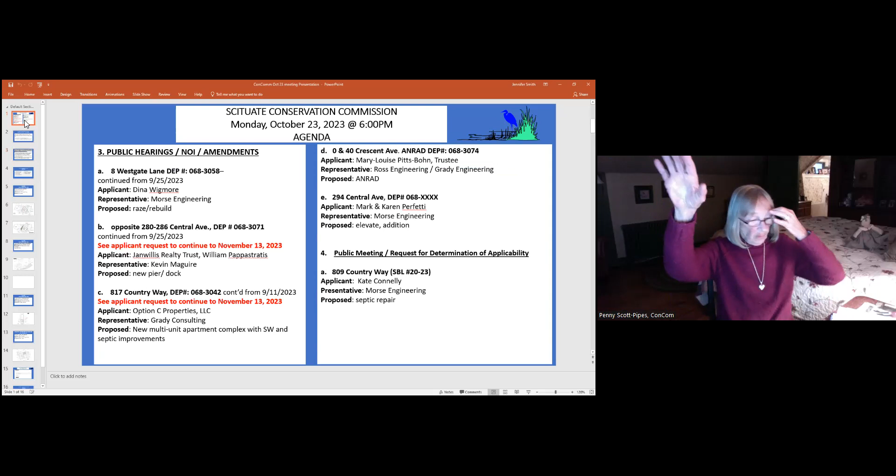So with that said, we have an agenda for the evening, and I don't know if anybody has any additions. I do. Okay, Ms. Pipes? I would just like to have a quick discussion at the end to give you guys an update on CPC. And then I was just going to ask if at some point we could discuss a request from an applicant at Buttonwood for a minor modification to their site, if we deem it appropriate. And I'll report in on a Mount Hope thing at Appleton Field.

So, I wonder, Frank, if we might quickly move the Central Ave and Country Way hearings to be continued to November, in case anybody's on for those, so that we let them know to move forward. Good point, Richard.

So both 280, 286 Central Ave, they're being continued. We're going to vote to continue them. I'll make a motion we continue 280 through 286 Central Ave to November 13th. Second, Richard. So all in favor? Jen? Yep. Andy? Yes. And Frank, yes. That's everybody, right? Yep.

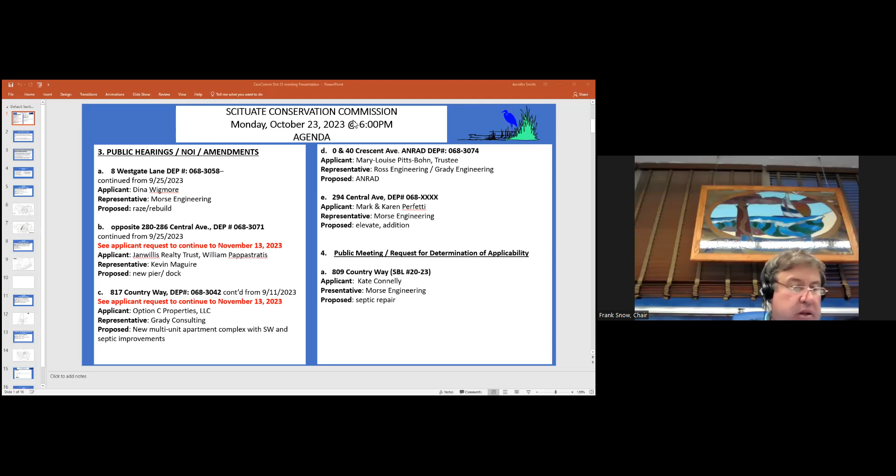Okay, and I'll make a motion we continue 817 Country Way till November 13th. I'll second that too. So that makes it pretty easy because the first line is all wiped out. So Jen? Yep. Andy? Yes. And Frank, yes. Great, thank you. Good idea. Okay.

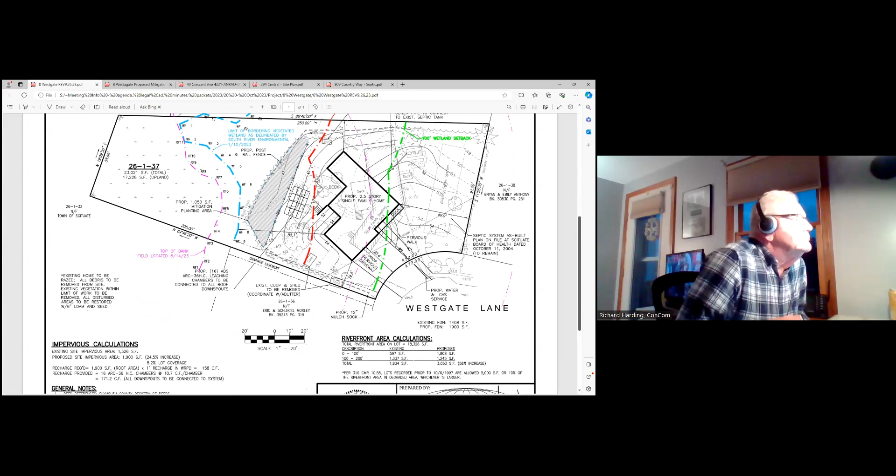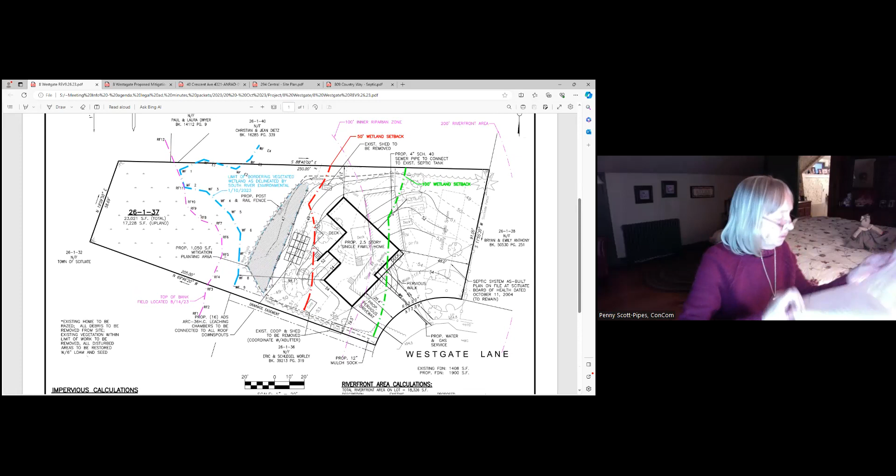Number 8, Westgate Lane. And we have somebody from Morse Engineering. Yeah, so Greg is on the call, and this is a continued hearing from 9/25 where you guys reviewed the first version of this, with the resource areas commented on by Art Allen, who's also on this call tonight. A revised plan was submitted that Greg will go through with a planting plan too, and it'll be important to listen to Art's comments, which just actually got distributed this morning. So probably a good time to take everything in and consider comments and maybe give some feedback, or just think about it. I'm not sure, but I'm going to put Greg on.

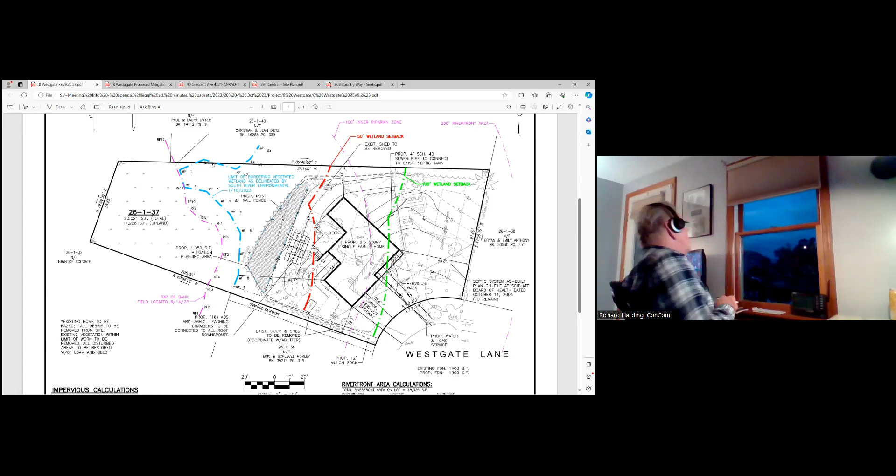Okay. Good evening, this is Greg. How are you? Hi, Greg. Good, Greg. How you doing tonight? Good. Yeah, for the record, Gregory Morse, registered engineer, Morse Engineering, representing the property owner, Dina Wigmore.

This is a continued notice of intent at 8 Westgate Lane. This was the raze and rebuild of a single-family home, a fairly dilapidated single-family home. The property was in disrepair. We submitted a notice of intent earlier this summer to the commission. The commission had hired Art Allen to go out and review the site. Since that time, we have revised the plan. That plan, we resubmitted our most recent set of plans on September 26th. We had located a couple of additional bordering vegetated wetland flags out at the site that Art had placed when he did the wetland review.

We also located the top of a bank associated with a river at the site. We were hopeful that the river out back was an intermittent stream. However, we were unable to document four days of dry flow conditions. So we located the top of bank and added the 100-foot and 200-foot riverfront areas to that. You'll notice the entire site is within the 200-foot riverfront area. This site would classify as a redevelopment because it is previously degraded within that riverfront area.

The project itself, we revised significantly the backyard portion of the project. We submitted in our letter documentation with the riverfront standards that the property will be a site improvement over what exists today. The proposed home is a slightly larger footprint, approximately 492 square feet larger in size. However, we're providing a 2.1 to 1 mitigation ratio.

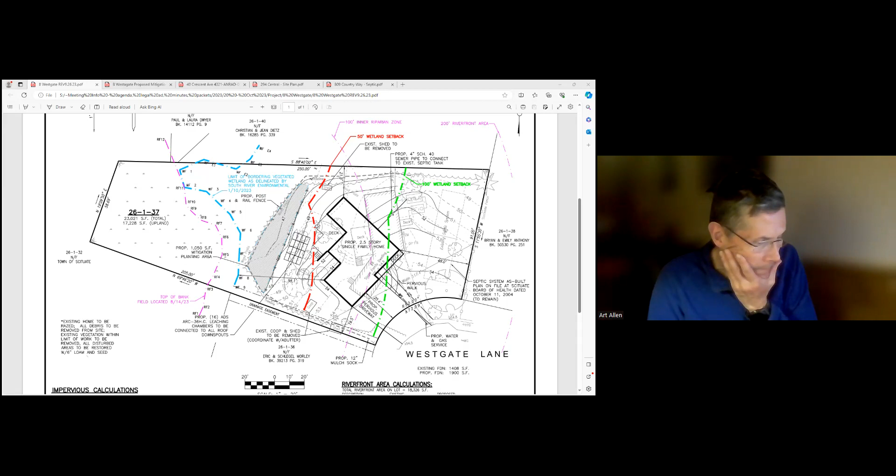That being said, I believe the only thing Greg did not mention was that this project was originally filed as buffer zone only. Once we noted the presence of the perennial stream/river, that put the project in the riverfront area, which is a wetland resource area, and that changes the filing fee and the status of the project.

So there should be an additional filing fee submitted, and also the revised plan, once it's finalized, should be submitted to DEP, because the original project and plan submitted was for a buffer zone project.

But yeah, it appears that all the additional flags I extended on the BVW are properly represented, as well as the mean annual high water line/bank of the perennial stream, along with the associated buffers and inner and outer riparian zones associated with the riverfront area. That all appears to be properly located on the plan.

Yeah, I agree the project has been improved with the additional mitigation area. I also agree that this qualifies as a redevelopment project, due to the existing or pre-existing conditions on the site. There's been significant mitigation added to the plan, which is definitely a bonus.

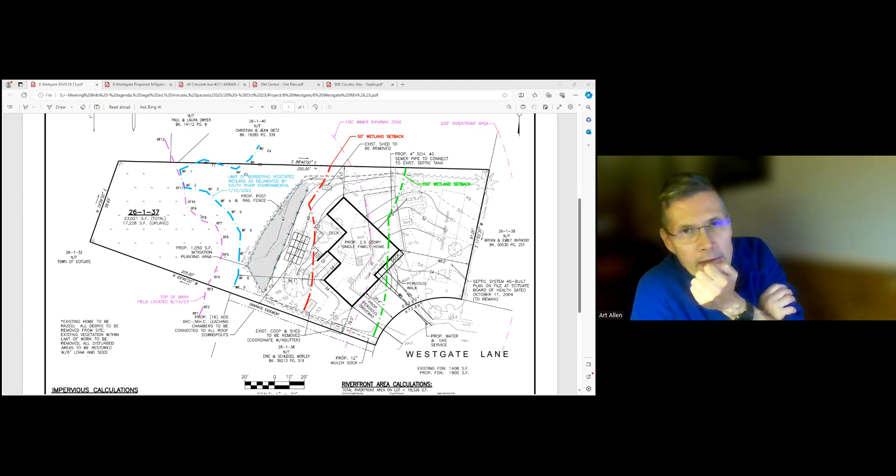That being said, clearly it had been developed down to that area where the old fence is located at the proposed clearing limits, and they are proposing some significant mitigation. I believe this project as designed now meets the redevelopment standards. It does constitute an improvement over existing conditions.

Obviously they still have quite a bit of work within your 50-foot no-disturb setback. But I guess I'll defer to the commission on that, because I know you allow some work, particularly redevelopment work, within that setback, and they are proposing quite a bit of mitigation.

Greg summarized my kind of minor plan revisions: changing that detail or the note on the post and rail fence barrier location, as well as showing topsoil to restore that restoration area, if you allow the grading to be done in that area prior to restoration planting.

So those things will need to be shown, the filing fee corrected and submitted. But other than that, that's about all I have at this point. Thank you. Wow, that's quite a bit.

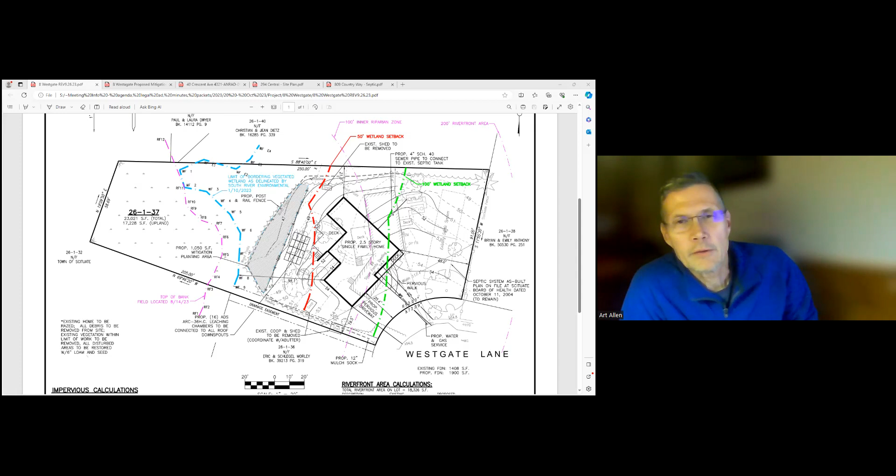Thanks, Art. Should we also be getting a revised NOI form? Yeah, technically the NOI right now says buffer zone only. If you want the record to be complete and correct, it should be at least that page on the resource area impact should be corrected and resubmitted. Yes. Okay.

Amy, do you want to comment any more on that before we go to the members? I think that's pretty comprehensive, as a matter of fact. It does appear to be a better project in some respects, in that they're giving you a good amount of mitigation, and we have accuracy in the plans for resource areas. I think that's a great benefit.

The stormwater capture, I suppose that's also good. I do get a little bit concerned about the plantings themselves and when that all goes down and how it gets maintained, because we seem to have struggled with that aspect on more than one project. It's really important to have that done up front when it comes to conditioning a project like this. The riverfront redevelopment gives you this ability, because it's technically an improvement, but the increase of disturbance within this resource area is over 1,200 square feet additional than before. So I don't necessarily think that's great, but that's about what I have right now. Okay.

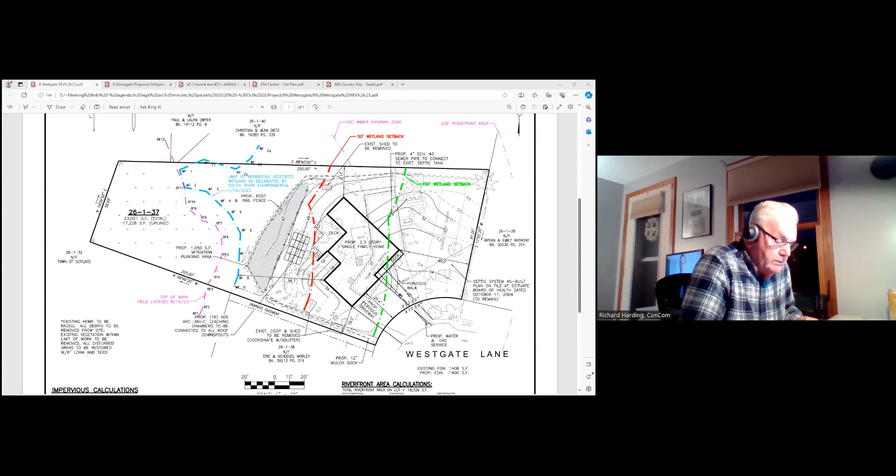Frank, I'm confused. So why don't you ask what you're concerned about? I'm confused because Greg said it was 492 additional feet and Amy said it was 1,200 additional square feet. So that's what confuses me.

Greg? Sure. So the impervious surface of the house itself is 492 square feet. The degraded area on the site, which includes any area not covered by the house, or basically impervious surface because we have a new driveway, so the total degraded area on the site does go up. As proposed, it goes up to 3,053 square feet. What exists there today for degraded area is 1,934 square feet. This lot predates the riverfront standards. On lots that predate the riverfront standards, you're allowed up to 5,000 square feet. So we're coming in at 3,053.

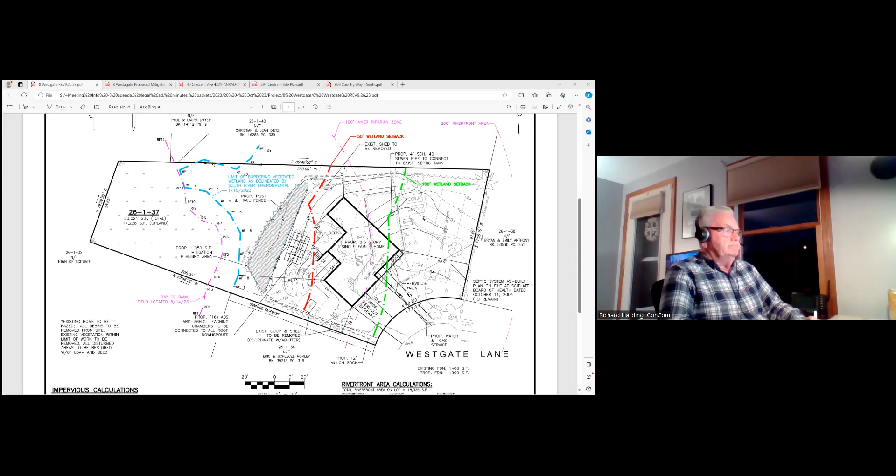Thank you, that helps, I appreciate it. Do you have any other comments, Richard? Nope, not now. Thank you. Okay. Penny? Yeah, I just have one question, Greg.

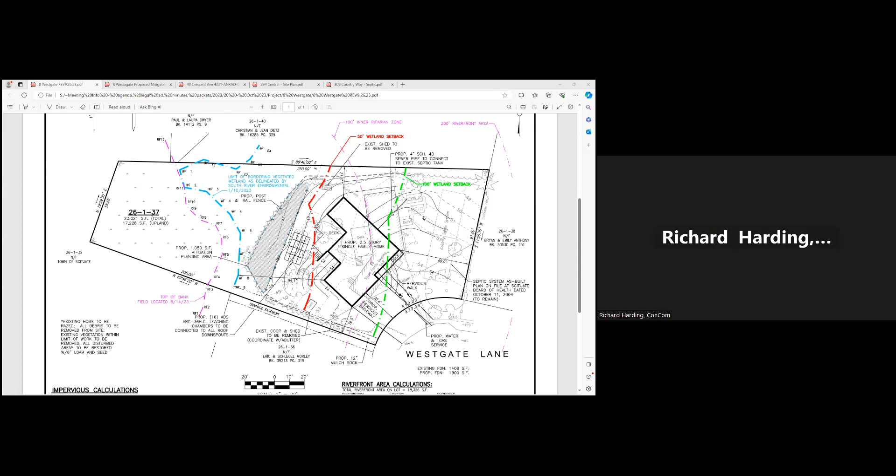The leaching chamber, why can't that go on the side of the house, between the 50 and 100 foot, instead of in the 50? Good question. The existing septic system is over on that side and in the front of the house, and we're reusing the existing septic.

I didn't see that there was enough room to fit it. Well, you could break the system up into two systems and do half of it where it's shown, and do the other half over on that northern side of the house.

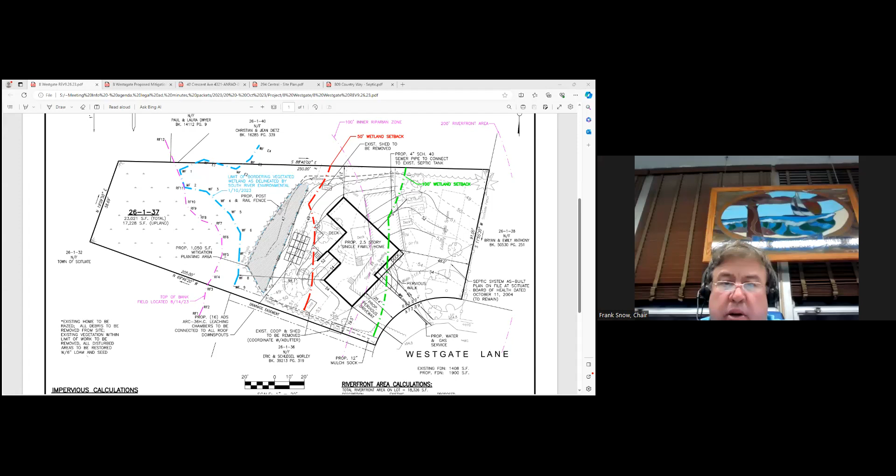Penny, do you realize that that's not the septic system? The septic system is on the far right-hand side. That area is the infiltration for the groundwater. So off of the septic, there is a 50-foot setback to any driveway. Okay wait a minute, I'm confused, but now I see it. Yeah, from the roof down spouts. I'm sorry, I didn't read the whole caption.

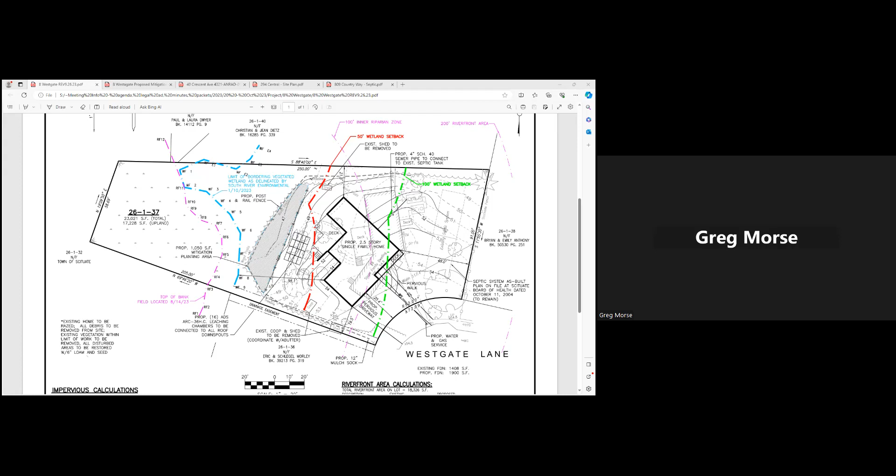That's all right. But I still just wonder, where there is that section on the north side where part of the old building was, behind, if you go behind the 100 foot towards the 50 foot, those two lines, there's an area there that maybe that could go in. I was thinking it's the leaching field to the septic. I think there's enough room in that location. If you wanted to relocate maybe half of the leaching chambers, you could. I don't think you could get the full system over there. Okay, all right, just a thought.

That's it. Otherwise, I think you've come back with a very nice project. Hey, Jen? I agree with Penny. It's super appreciated how much effort's been put into this revision.

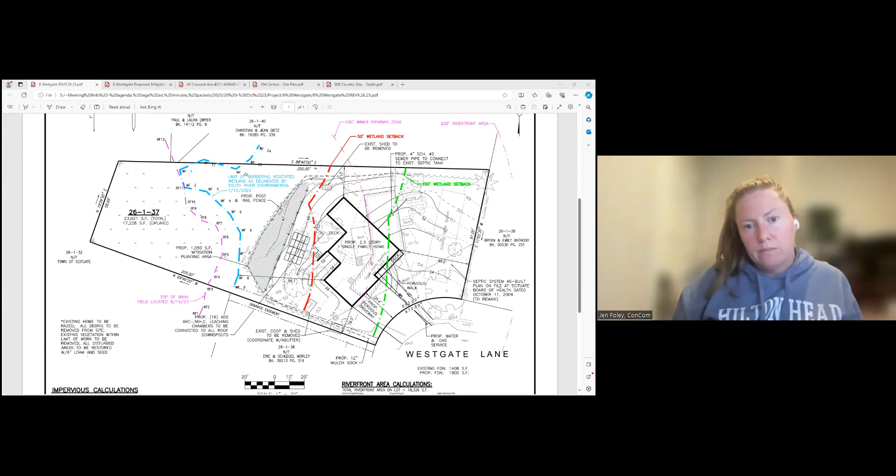I do think it would be valuable to move whatever is possible out of the 50. So if some of those leaching chambers could be moved, I think that's a win. Okay. Andy? Nothing additional for me, I'm good.

Okay, do we have a hand up already in the audience? Anybody? Yes, Jerry, you want me to let Jerry go? Sure. And just, you want to state your name and address before you start.

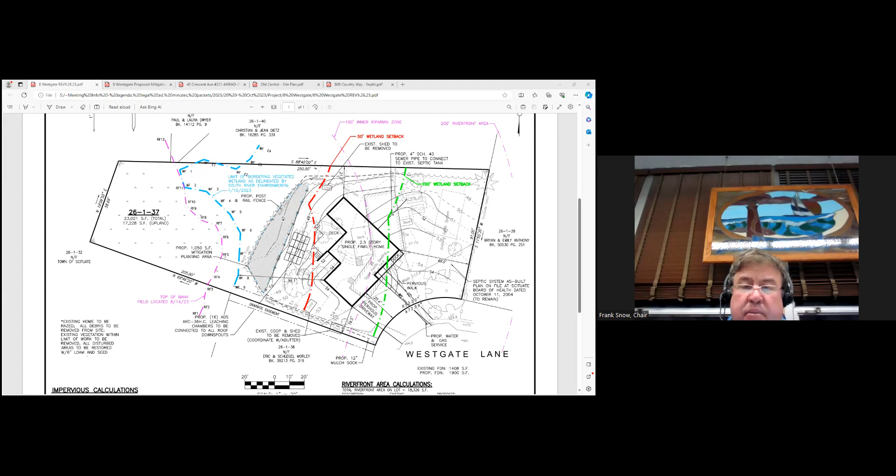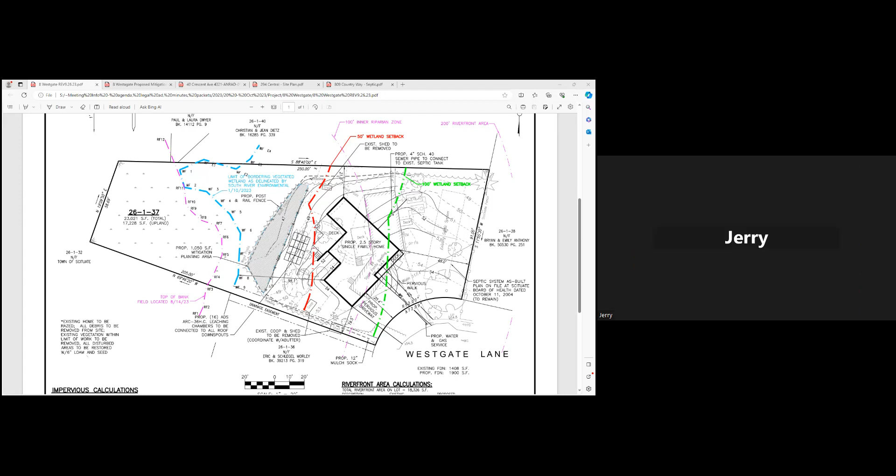Yeah, so I'm a little bit late. I just want to say my name's Jerry, and yeah, it's mediocre. Can you give us your address and full name, Jerry? Yeah, like I said, my name's Jerry, and yeah, nice project. I bet I'm hoping for a last name and address. Okay, not gonna give it. Do we have a John?

Looks like Jerry dropped off. Is there a John? There's a John, but he doesn't have his hand up. Yeah, I just switched over. I saw what happened, sorry. Anybody else?

We do have a John with his hand up. Oh, okay, John has his hand up. I'm gonna call on John.

Hi, my name's John. John, can you give us your full name and address, please? He dropped off too, so my name's John. I want to say, I agree with what Jerry said. So John, could you please give us your full name and address? Yeah, like I said, my name's John. Okay, thank you.

It's a first. Okay, who else? How do we do this? Oh, this is interesting, do we have any? This is interesting, new and different. Is this gonna be the same thing? Do we have another hand up? I don't see any hands up. No, let's move. Okay.

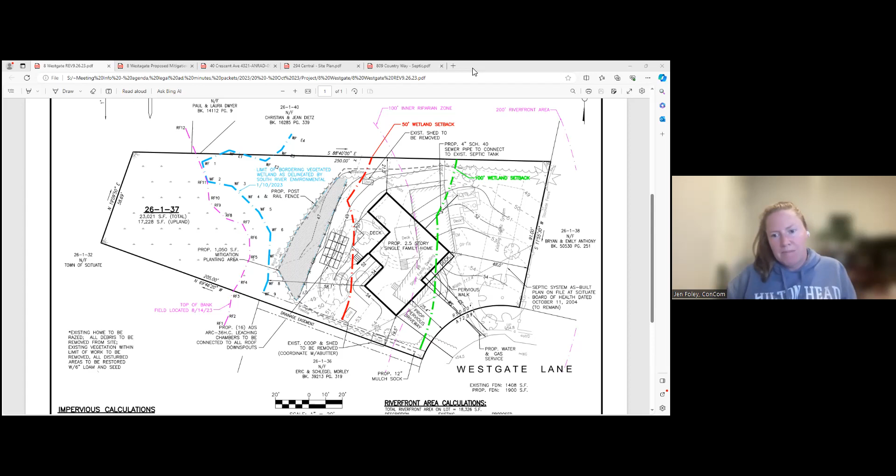Okay, could we close this, Frank? Well, I'd like to, go ahead, do we got anybody else? I'm thinking that we need revised info before we're closing.

Okay, can I just, before you — so I did visit the site. I had noticed some disturbance and went out there, and they had actually started some work there before any filings. But the site was a mess — over the years, just lots of debris and all kinds of things, animal pens and things that went right down towards the brook. But I do think this kicked off before any permit was issued.

Was that addressed? Well, so, correct, Frank, there was a couple of large trees, one in particular very large diameter, that was cut down. Some other trees were cut down before the fact, so we did send a violation notice out, and that was right before the project kicked off. So I'm not quite sure how this project addresses those additional cuttings, I guess you could say.

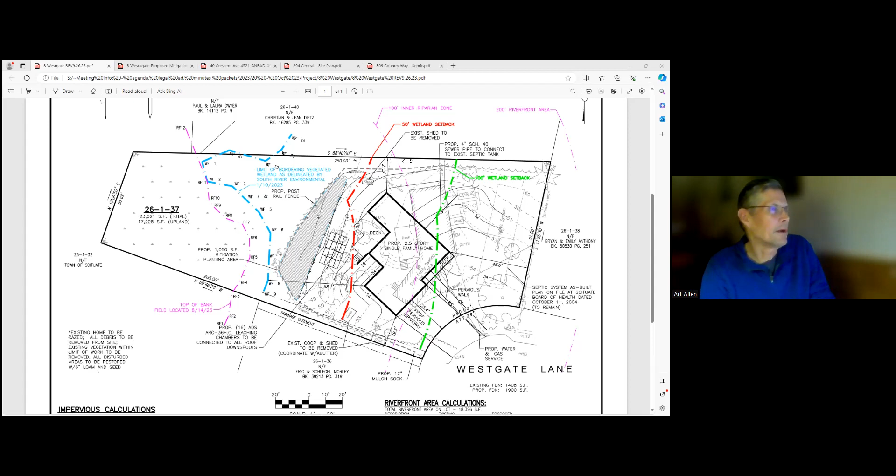I'm happy to hear from Art. Yeah, Art Allen from EcoTec — given the layout, I mean, it's appropriate for the proposed layout, whether that layout could be changed. I might defer back to Greg for a brief discussion of why the proposed structure is where it is, as opposed to being pulled further back away from the resource area. But if that's where it needs to be for whatever reason, I think the mitigation is appropriate.

Okay. So what do you think you need for additional information before we close this, Amy? Well, we're gonna need a revised plan. We're gonna need filing fees, corrected form submitted to the state too, and NOI, any other form, and comments that I might be missing that were reviewed during this discussion.

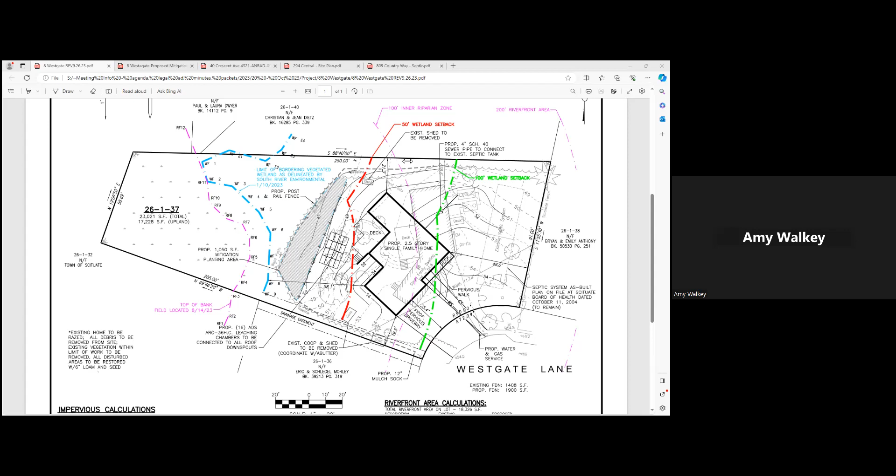And it looks like we have a hand up, Frank. Yep, we have a Brian M. And again, if I could get a full name and address.

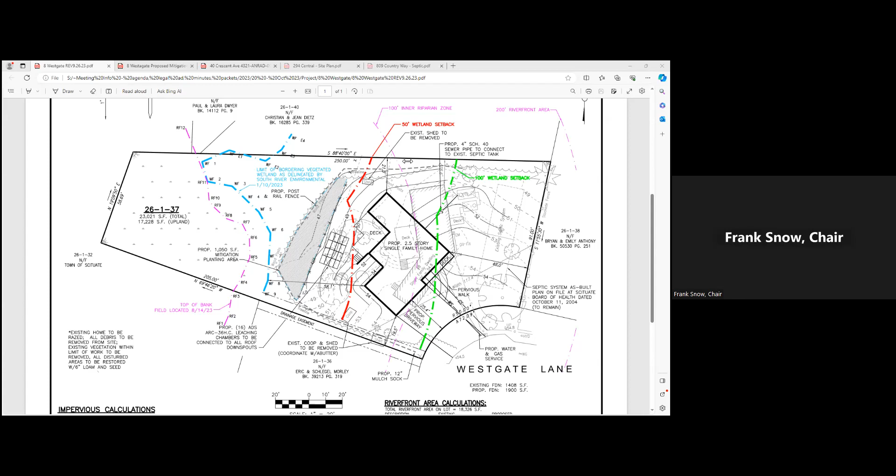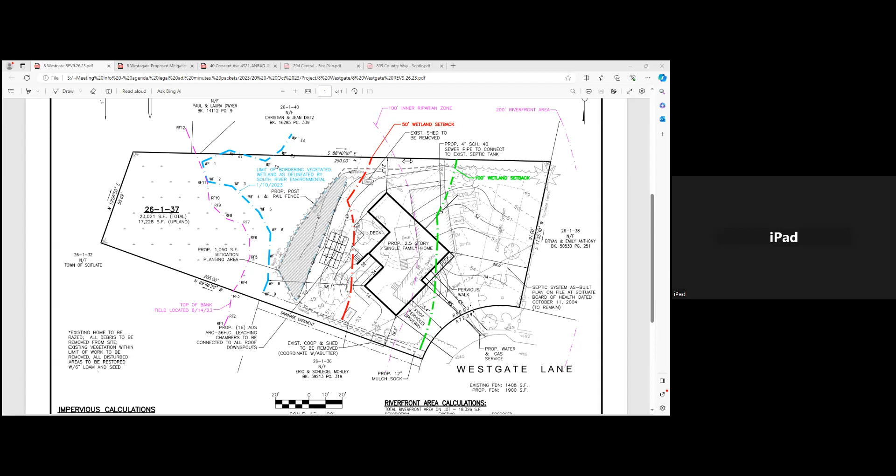Just wanted to add on to what Jerry said. No, forget it. Oh, this is discouraging, huh? Yeah, oh well, I didn't know we drew such a crowd. I'm gonna call their mother. Oh, well, shame on them. Was a slow night somewhere. Won't be when their mother hears about it.

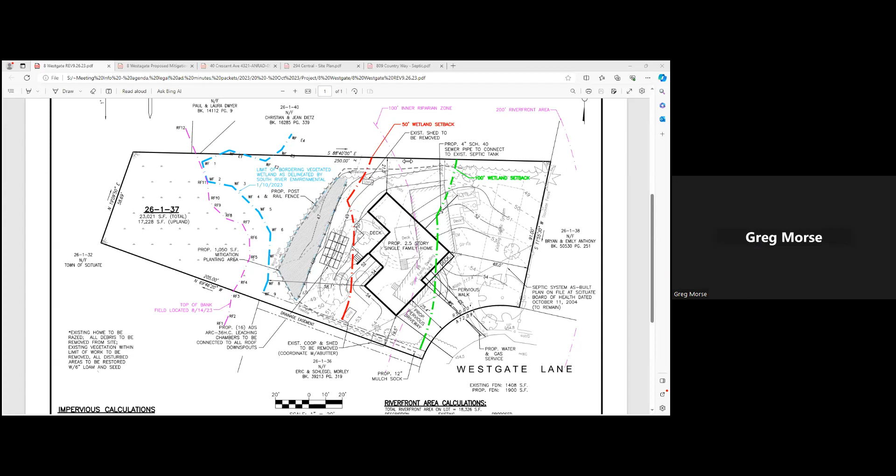All right, so when should we continue this to? Greg, how long before you can get the info? If it would be possible to be on the next meeting, I can have the updated form and the updated plan, probably within a day or two, tops. That would be November 13th. And fees, Greg, too. Yeah, and fees. Okay.

So you want to give a motion, Penny, or somebody? Wait a second, I just want to make sure. Is it November 6th? 13th? Oh, the 13th, okay. I'll make a motion that we continue 8 Westgate to November 13th.

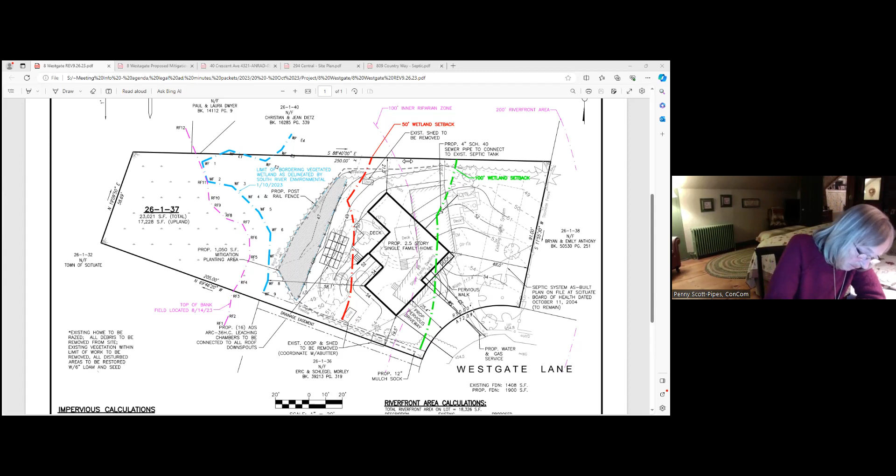Second from Jen. Okay, Penny's made the motion, Jen's the second. All in favor? Richard, yes. And Andy? And Frank, yes. Great, thank you.

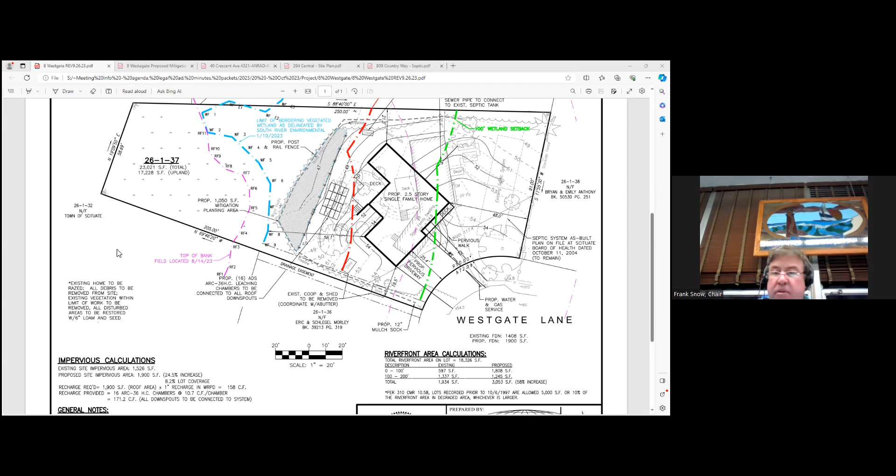Thanks, Art. Thanks, Greg. Yep, all set with me for tonight. Yes, yes, thank you, Art. Have a nice night. Thanks, Art. Have a good one. All right, we'll talk. Bye-bye.

So, 0 and 40 Crescent. This would be open, the public hearing.

On October 23rd, 2023 at 6 p.m., the Scituate Conservation Commission will hold a wetlands hearing under Chapter 131, Section 40 of the Massachusetts General Laws, and Section 30700 of the Town of Scituate Code of Bylaws, regarding the application of Mary Louise Pitts Bone for an abbreviated notice of resource area delineation (ANRAD) on properties located at 0 and 40 Crescent Ave, Scituate. Abutters and other interested parties are invited to attend. Information to access the virtual meeting is available on the agenda posted on the town website.

And do we have an applicant, anybody on for this? We're looking for Paul Mirabito, so he should raise his hand. But it could be that this is an iPad, not him directly. This isn't going anywhere because this is out for peer review and the comments have not come in yet. Okay, so I did see an iPad pop up, yeah, I see an iPad. Can somebody let that in? Sure.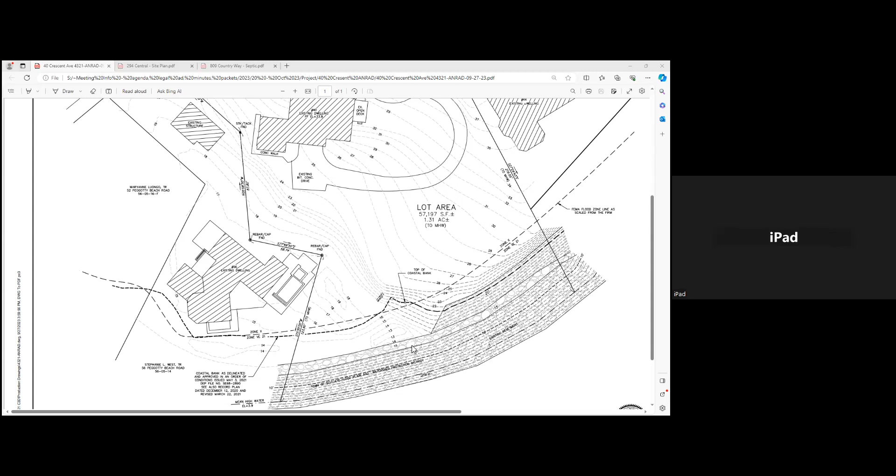Hi, Frank, can you hear me? You got an iPad, Paul. I do. My message got back to you, huh? Somehow, some way it did. Well, that's great. All right, thank you.

This is Paul Mirabito from Grady Consulting, representing the owner and applicant, Mary Lou's Bond. We have surveyed this property and prepared the ANRAD plan that we submitted to you for the purposes of identifying and confirming the location of the top of Coastal Bank, as we showed on our plan. The location we show is consistent with what the commission has approved in the past.

If you note on the lower left hand portion of the plan, the abutting property at 56 Peggotty Beach Road, there's a note that the coastal bank shown there was approved in an order of conditions issued in May of 2021. We show that on our plan for reference, and also the fact that our line on our site is consistent with a FEMA flood zone. The FEMA flood zone on the lower portion of the property is elevation 21 in the velocity zone, and all of the land above it, which is the vast majority of the lot, is in zone X, which is not a flood zone.

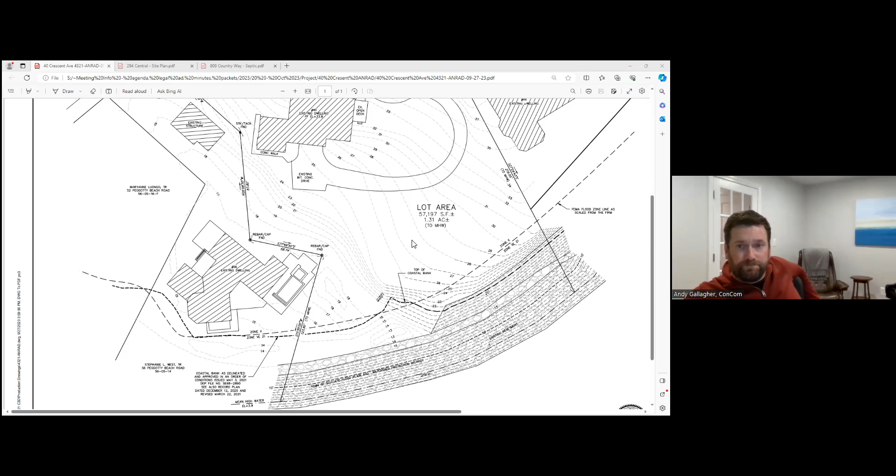Anybody, we can walk through this. Does anybody have anything to start with? You want to wait for a review? I don't think there's much to talk about until there's a review. Penny? Jen? I want to wait, same. Andy? Yep, good. Amy, any idea how long that's gonna take?

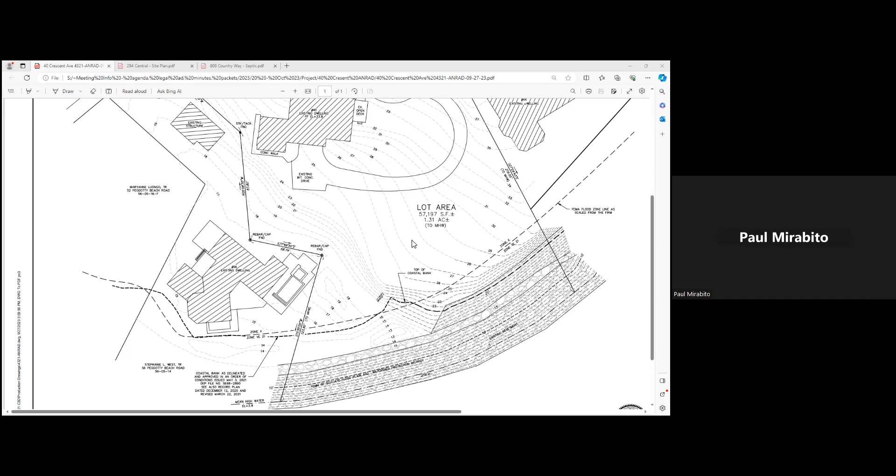I would expect we'll have the comments before the end of the week. So then, Paul, if we have those comments, you're gonna want to review them. When do we want to continue this to? Probably your next meeting, the 13th of November. Do we have room for that? Can we do that? Yes. Let's get these things moving.

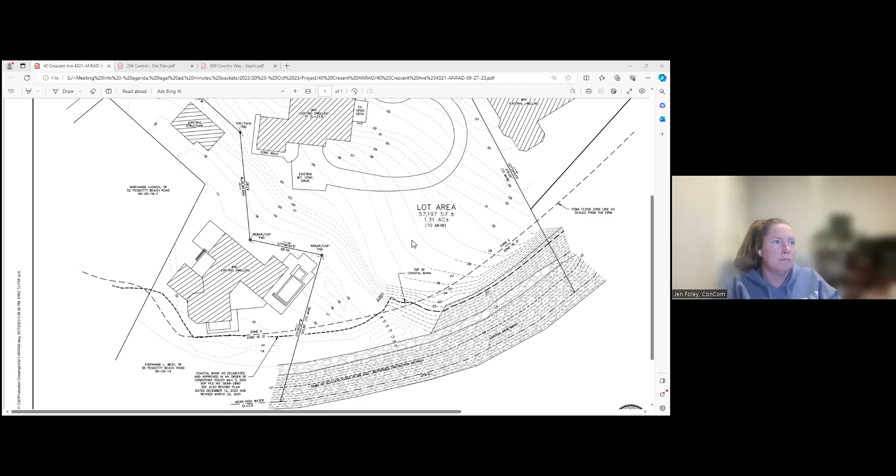Okay Penny, so you need to make a motion to continue 0 and 40 Crescent Ave, ANRAD, till November 13th. It's a motion from Penny, second from Jen. All in favor: Richard, yes. Andy, yes. Frank, yes. Great, thank you very much.

Frank, you didn't ask me for my full name and address. Because you're pretty well known, Paul. Recognized your voice. Thank you. And I saw, just when I saw iPad pop up and I knew you were supposed to be on there, I took a shot that it was you. Our word got back to me. Good enough. Thanks, Paul.

Okay, where are we? Opening 294 Central. On October 23rd, 2023, at 6 p.m., the Scituate Conservation Commission will hold a wetlands hearing under Chapter 131, Section 40 of the Massachusetts General Laws and Section 30700 Town of Scituate Code of Bylaws regarding the application of Mark and Karen Perfetti for work related to elevating, relocating, and adding an addition to a family dwelling at 294 Central Ave, Scituate. Abutters and other interested parties are invited to attend. Information to access the virtual meeting is available on the agenda posted on the town website.

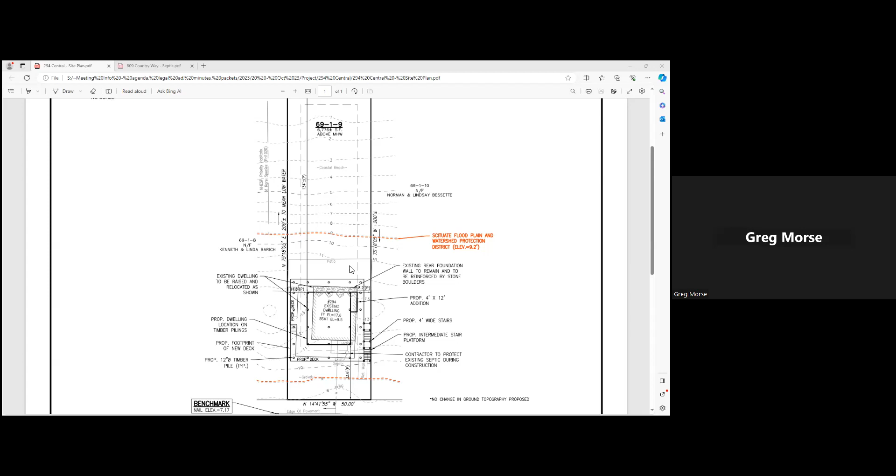The property being down in Humarock is considered barrier beach. It's located within the velocity zone, VE at elevation 18. The proposal is timber piles. Our first floor elevation would be at elevation 22, so it complies with the minimum of a 3-foot freeboard above the velocity zone elevation. This is going to have to be continued as we do not have a DEP file number yet, and the structural plans are not complete at this point. I expect them to be in any day, but I figured we'd open the hearing and get any comments so that we can hopefully address them and close this at the next hearing.

Okay. Amy? Yes. So because this has come up before, just gonna say it - is that the existing dwelling to be raised and relocated as shown, the home is coming up and an addition is going on it, so it's not going away as opposed to raze, where you would tear it down. That's something that came up recently, but I just wanted to clarify with Greg that's his understanding of this project too. That's how it's advertised, it was how I spoke to the owner about it.

This is a project that you actually conditioned a similar project here before, which had been to tear the house down, but those orders were from a number of years ago, and the owner never recorded them and didn't move forward. So this is why this is a new NOI for this property address. Well, I'm reading this to say they want to elevate the existing home - is that correct, Greg? Yes, it is. And the home's also getting repositioned a little bit. Yeah, it's getting repositioned slightly, and it's getting a 4x12 addition and a new deck around it. Okay, good.

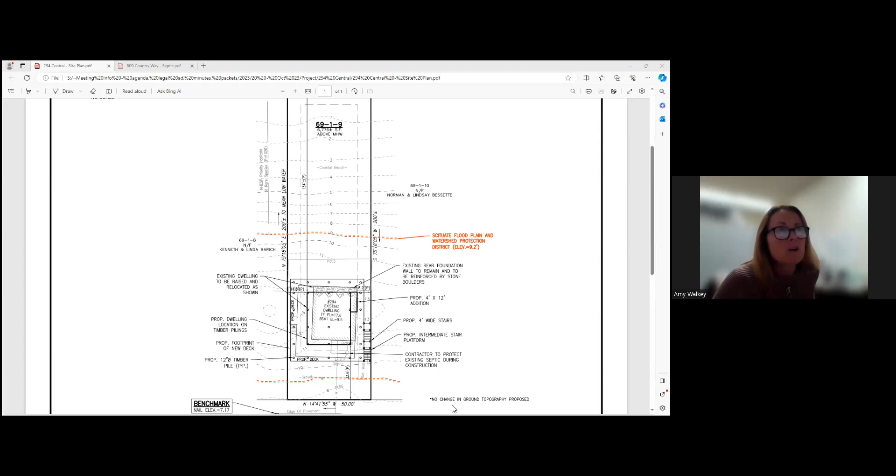And otherwise, I think that's most of my comments. It doesn't look like they're touching the septic system here. Yeah, no, DEP hasn't posted their comments yet on it, so we're still waiting. That's what I got.

Greg, do you want to comment on that before we move on to members?

Sure. We're not touching the septic system at the property. There's a concrete wall that runs along the back of the existing home. We were proposing to leave that in place.

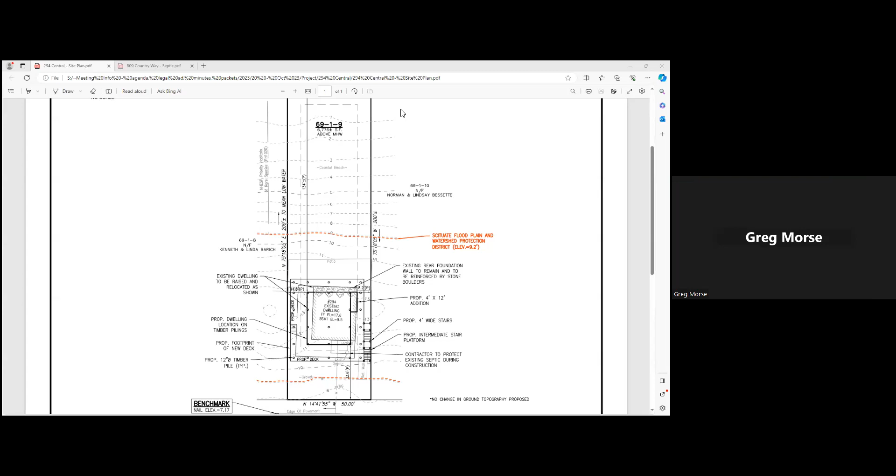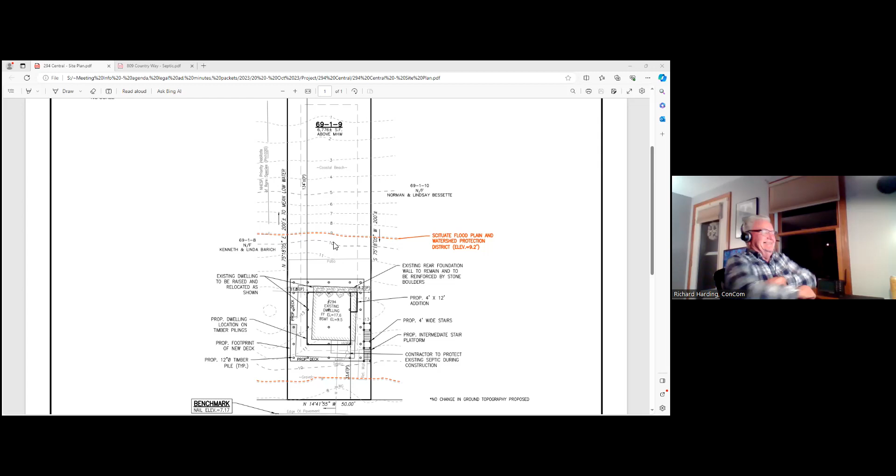Jen, what do you think? Amy? I think whatever Jen's look was, that's what you should go with. I'm quite sure she mouthed Amy. Well, she has the book with the tally.

So if the tally is more than 6, then it's starting to get pretty big because we've got the opening of the big wastewater treatment plant, or water treatment plant site. Let's not call it a wastewater treatment site. Please, you know what I'm talking about, the water treatment plant, sorry.

All right, could we move this to December? Do it till December 4th. Okay, yeah, because we only have one meeting in November with Thanksgiving and all that.

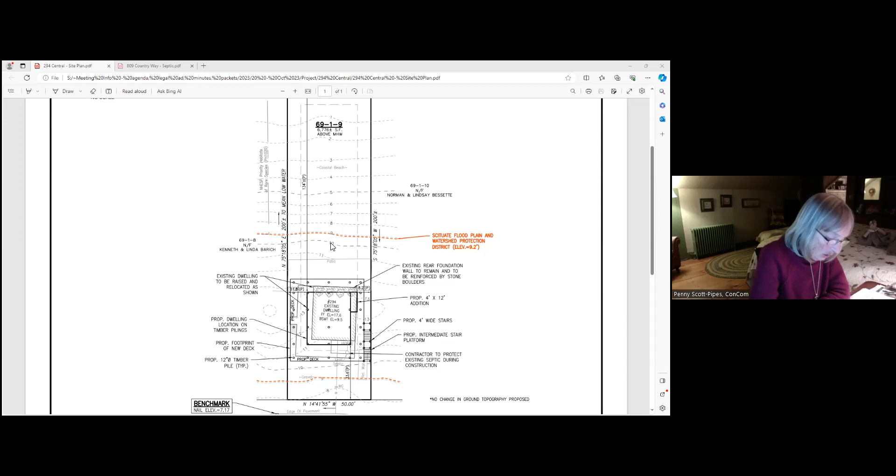So December 4th. Okay, I'll make a motion - Penny, to continue 294 Central Ave to December 4th. That's Penny, a second from anybody? Second from Jen, thank you Jen.

All in favor - Richard, yes. Andy, and Frank, yes. Thank you.

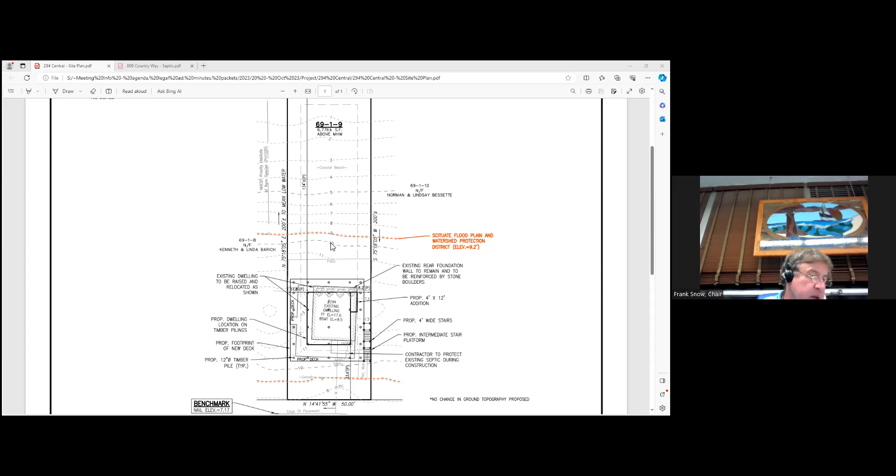809 Country Way. On October 23rd, 2023, during the 6 p.m. meeting, the Scituate Conservation Commission will act on the request of Kate Connolly for determination of applicability of the Massachusetts Wetlands Protection Act and the Scituate Wetlands Bylaws for activity related to septic repair of a single-family dwelling at 809 Country Way, Scituate. Abutters and other interested parties are invited to attend. Information to access the meeting will be available on the agenda posted on the town website.

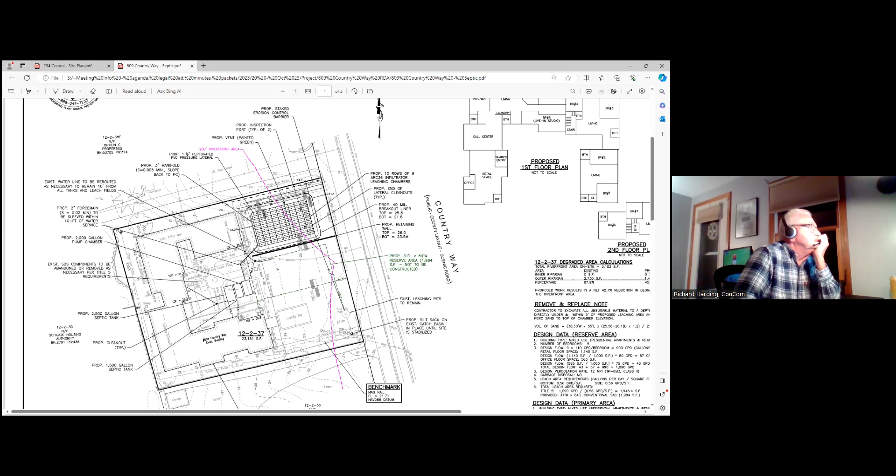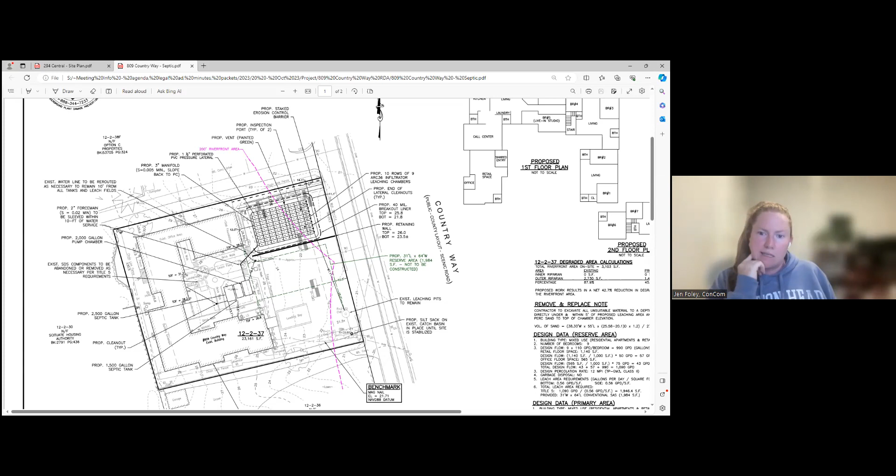Okay, Penny, this is in your neighborhood. Yeah, I'm trying to, it needs the septic. I mean, no, I don't have any problem with it. Jen? No, I don't think I have anything. Sounds like a great building to reuse, excited to see it. Okay, Andy? No, I do not have any questions. Okay, Richard? No, I don't have any questions either.

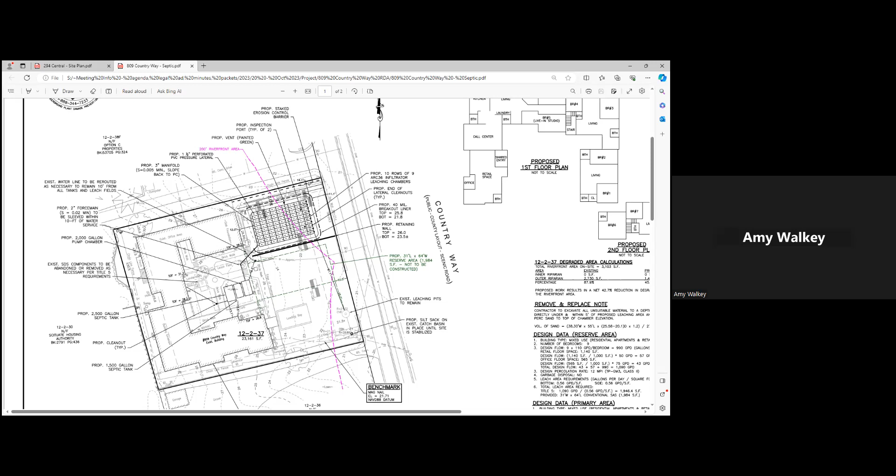Amy, I jumped right over you, any other thoughts? Well, okay, just a couple of things. One is, we're not necessarily agreeing to this resource area line, but given what we know about this area and the resource area, I would agree that this is a -3. So, although it is under Board of Health for review still, so the plan could change, but I don't see any reason why you can't give it a negative finding this evening. Do we have anybody in the audience on this one?

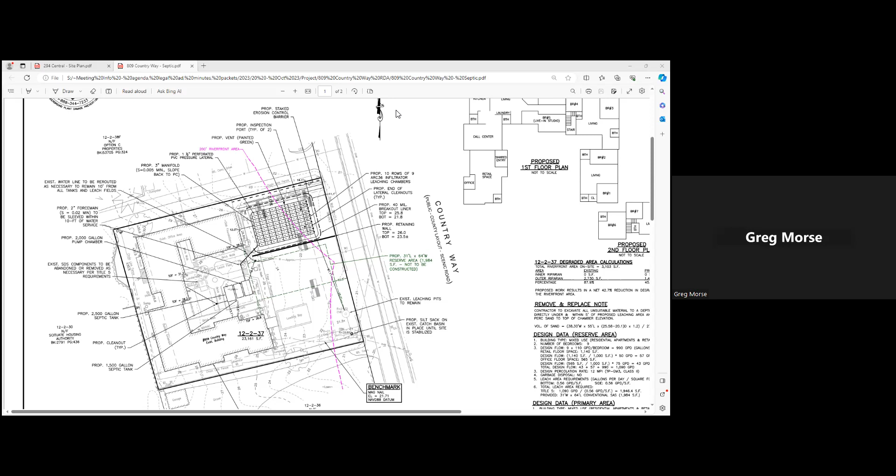Seeing none. Greg, does the parking go back over this, or does this get grassed, how does that work? So it gets grassed over when this is all done. The resultant, I think we're left with an 11 space parking lot remaining with the building. None of the individuals that will be living in this building drive.

Okay, do we have any? We don't have anybody in the audience on this one. Okay, can I make a motion? You certainly can. I make a motion for a -3. Can I have a second? Second from Jen. Okay, all in favor? Richard, yes. Andy, yes. And Frank, yes. Great, thanks Greg, thank you, have a good night. You too.

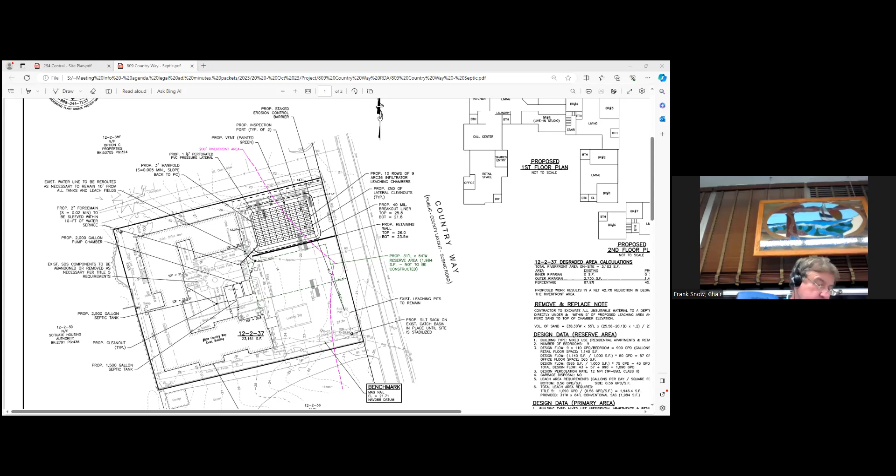One of them, 57 Garrison, was the pool house up on Walnut Hill. Do you remember that one? Oh, wow. So that's in with a C of C, and I don't see a reason why we shouldn't be able to issue that one after review of the as-built and the conditions.

And then there was also a request for a group of these new builds, or they were tearing down, on the Glades: 83, 83R, 87. This one is a little more complicated, in that the conditions for these properties did say some of the work hasn't been done, although I think it's specifically 83 that has those conditions associated with the property, but the work that isn't done is physically not on that lot. So we might be able to let that one go, unless you want to still keep them together, because it was the same developer that developed all three, so you reviewed them and tied them all together. So that was the discussion there. On that one, Amy, were there separate orders for that property, right? And the plantings were for the other site?